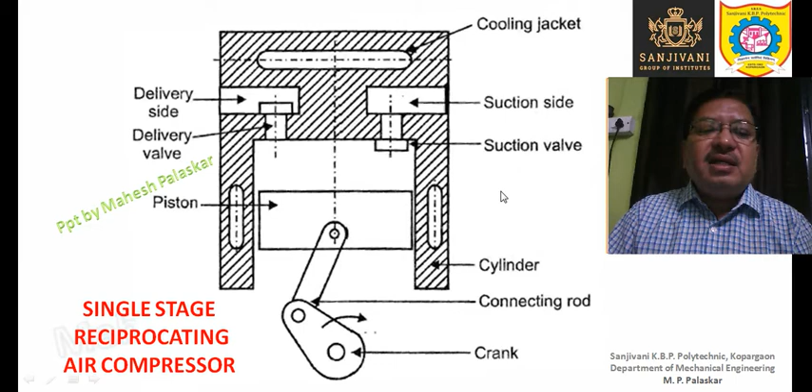So in order to increase the life of the compressor, it is necessary to reduce the temperature, to cool the compressor. So for that we are having the cooling jacket, water cooling jacket. So this is also the portion of the water cooling jacket. So this was about the construction of the single stage reciprocating air compressor.

Now let us try to study the working of the reciprocating compressor. So we are studying the working of the single stage, single acting reciprocating compressor with the help of the PV diagram. Now this reciprocating compressor may be vertical or it may be horizontal. Though it may be vertical, here the cylinder is shown horizontal.

So this can be considered as the cylinder and this can be considered as the piston, right? And here the PV diagram will also be drawn. And you can see that there is a coordination between this piston cylinder and the PV diagram. The various positions 1, 2, 3, 4 and the various processes 1-2, 2-3, 3-4, 4-1 can be shown here.

Actually these points which represent the end and the start of these processes are shown in the PV diagram as well as on this cylinder as the positions of the piston. So point 1 is shown here on the PV diagram and that is nothing but a position of the piston. Points 2, 3, 4 are all positions of the piston as well. They are the points on the PV diagram.

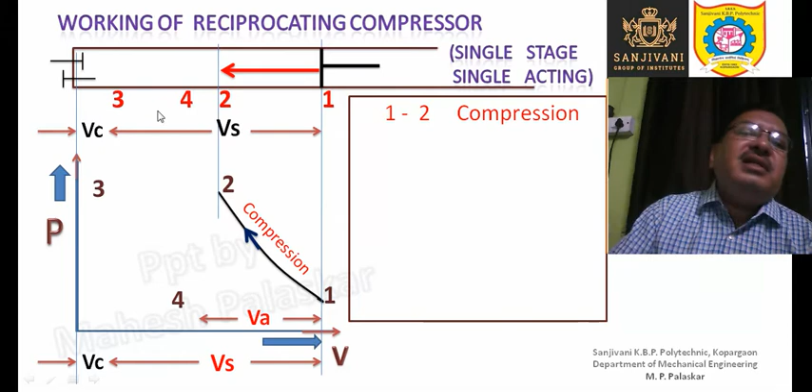valve gets open. And since the exhaust valve opens due to the increased pressure P2, the delivery of the compressed air will start from point 2. Compressed air will leave the engine cylinder and go to the reservoir where it is stored, right? So at point 2, the delivery valve is open. DVO means the delivery valve.

So the delivery valve gets opened at point 2, and the delivery of the air takes place from point 2 to point 3. So the process 2-3 is nothing but the delivery of the compressed air from the compressor cylinder to the storage tank.

Now when the piston reaches the inner dead center, or top dead center in case of a vertical compressor, you will find that there is some space between the cylinder head and the extreme position of the piston. So there is some gap. Some gap has to be kept there, because otherwise the piston will dash against the cylinder head, right?

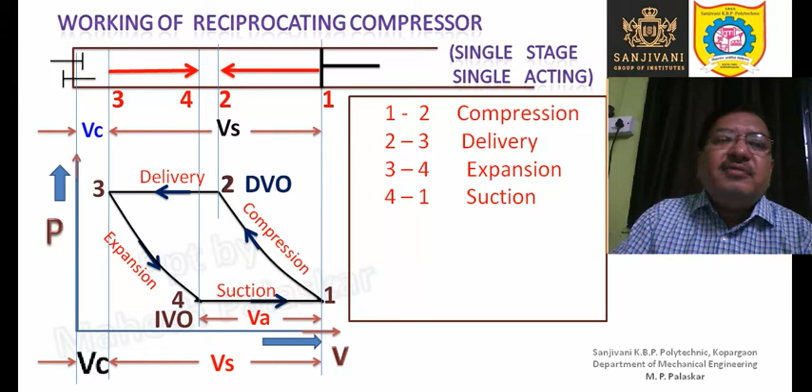So these are the 4 important processes which take place inside a single stage, single acting reciprocating compressor. We have studied this with the help of the PV diagram, and we have correlated the PV diagram with the actual motion of the piston inside the engine cylinder, right? So now let us go ahead.

This VA is the actual volume, because the suction starts at point 4 and ends at point 1, and whatever volume of air has been sucked into the engine cylinder is VA. So the actual volume of air sucked into the engine cylinder, considering the STP condition, standard temperature and pressure, is VA, and this VA is divided by VS.

VS is the stroke volume. Geometrically, stroke volume means the area of the piston multiplied by the stroke length, or the swept volume, the volume swept by the piston inside the engine cylinder as it moves from one extreme position to the other, from inner dead center to outer dead center, or top dead center to bottom dead center.

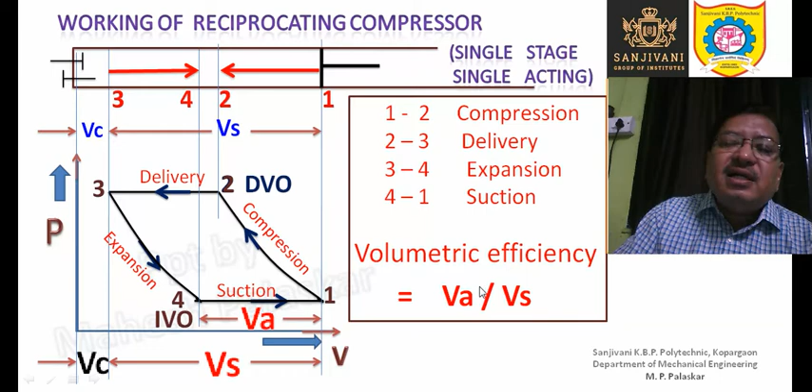So the volumetric efficiency is defined as VA upon VS. VA is the actual volume of air sucked considering STP conditions, and VS is the stroke volume, right? While finding this VA volume, we have to consider the inlet conditions of temperature and pressure. But these inlet conditions may vary from location to location.

At sea level, the pressure is 760 millimeters of mercury, that is 1.01325 bar. But as we move higher and higher, this pressure goes on decreasing. So when we find the volumetric efficiency of two compressors, we compare them. So that is a relative term.

So that the comparison is fair, we consider standard conditions of temperature and pressure. The standard pressure considered is 760 millimeters of mercury, and the standard temperature considered is 15 degrees centigrade, or more precisely 15.6 degrees centigrade.

So considering that pressure and temperature, we find the volume of air, the actual volume of air VA, and the stroke volume is nothing but the product of the area of the piston and the stroke length. So that is the definition of the volumetric efficiency.

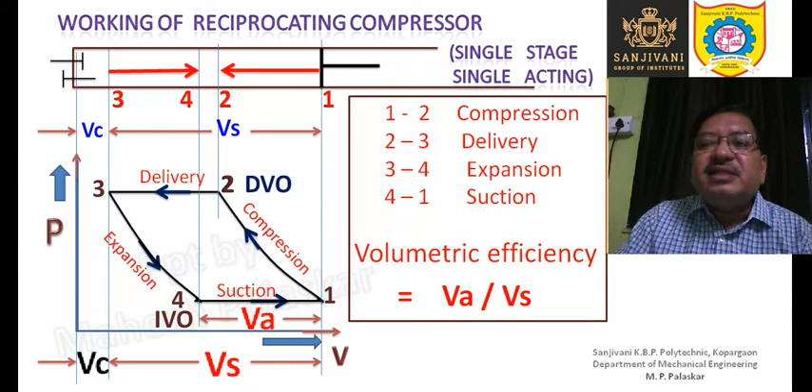Once again, we have defined the volumetric efficiency, and we have studied the construction and working of the single stage, single acting reciprocating compressor. Now we can also study the construction and working of the double acting compressor. We should try to understand the difference between the single acting compressor and the double acting compressor, and at the same time understand the construction and working of this double acting compressor.

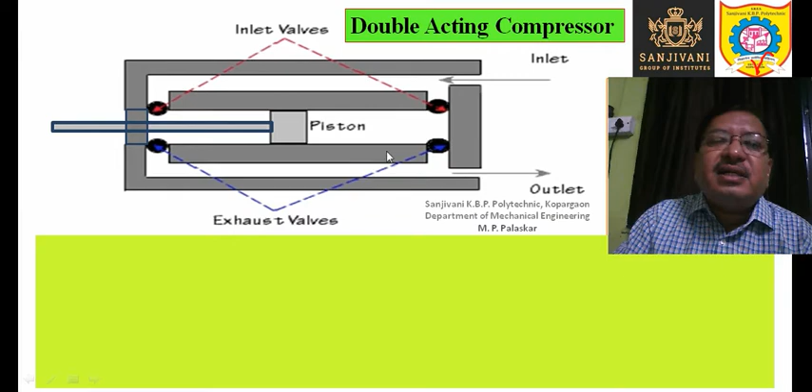In the case of this double acting compressor, we have two sets of suction and delivery valves. You can see this is one suction valve, another suction valve; two suction valves, or two inlet or intake valves, are present. Similarly, we have two delivery valves. This is one delivery valve, this is another delivery valve, on two sides of the piston, or two ends of the cylinder, in this case.

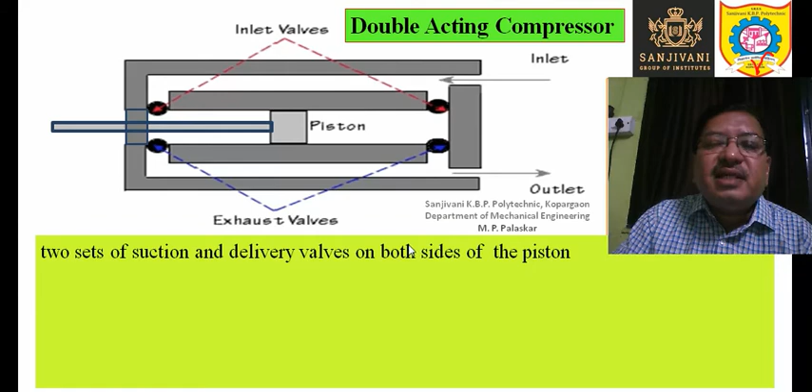Both sides of the piston are utilized in compressing the air. This is one side of the piston, this is another side. This side may be called the piston rod side, and this side may be called the cylinder head side, or the side opposite to the piston rod side. So both sides are utilized to compress the air.

The air is sucked, the air is compressed, then the expansion, the compression, the delivery, all these processes take place on both sides of the piston. So there is more utilization of the cylinder, and the advantage of the double acting compressor is that you can get a more uniform flow of compressed air.

The intake and delivery valves operate corresponding to the stroke of the compressor, that is, in which direction the piston is moving: from inner dead center to outer dead center, or top dead center to bottom dead center, or bottom dead center to top dead center. Depending upon that, these valves are opened and closed. That we can study immediately.

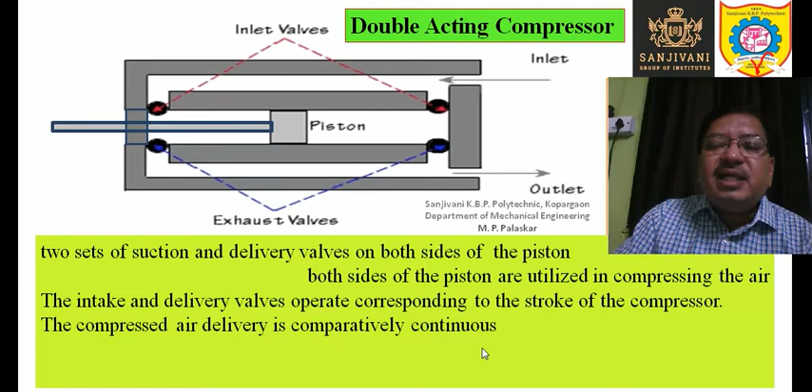The compressed air delivery is comparatively continuous. As I have told you, if you compare with the single acting compressor, you will find that the delivery of the compressed air is more continuous in the case of the double acting compressor.

Thus both sides of the piston are effectively used in compressing the air. That is the specialty of the double acting compressor. Ultimately we are achieving the compression, but all the four processes, suction, compression, delivery and expansion, are taking place on both sides of the piston.

So let us now study the construction and working of this double acting compressor. First of all, it consists of the cylinder and piston, just like the single acting compressor. But here it has two inlet or suction valves, 1 and 2, and two exhaust valves. This is one inlet valve, this is another inlet valve. And this is the overall inlet, this is the overall outlet of the compressor.

So overall there is only one inlet for the compressor and only one outlet, but inside the cylinder you will find that this inlet is divided into two inlets, and this outlet is also divided into two outlets. These two outlets then get joined here.